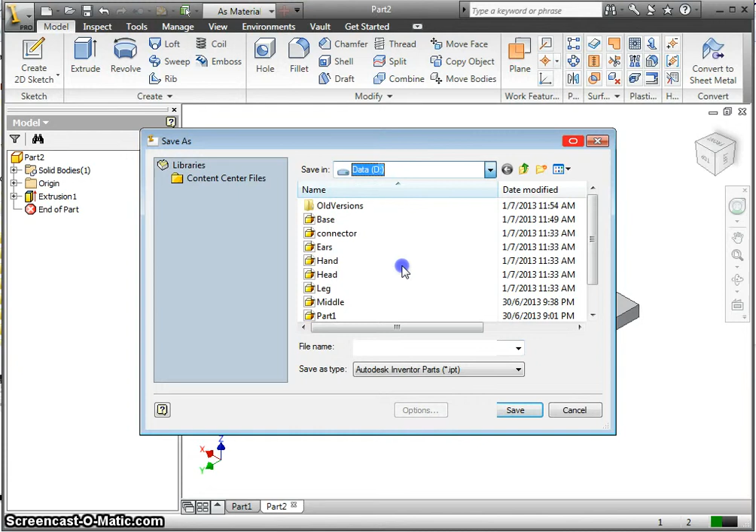I've completed the extrusion. Let's do a save. It's always a good idea to save your work so that you don't lose it when there's a crash.

Okay, I've created a folder called donation box. You can find a place in the drive, create your name. In this case, I'll be Mr. Chua. Donation box. Okay, and I'll save a part. You can save the part as my donation box. Notice the extension is .ipt.

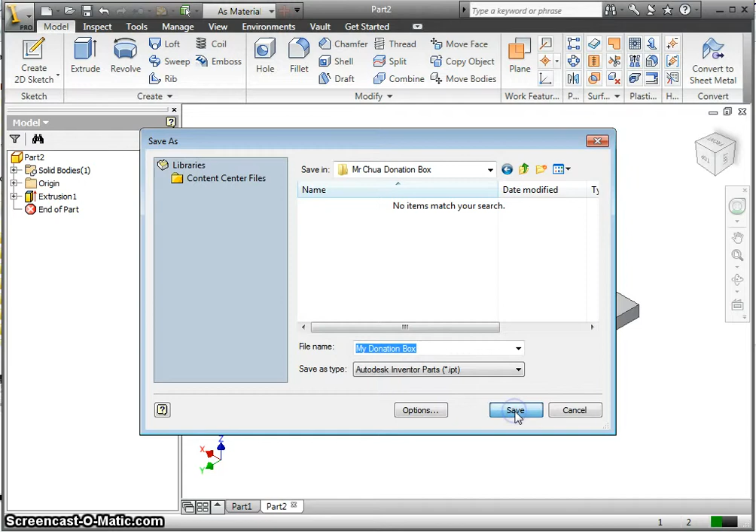This is the standard extension for Autodesk Inventor. Click Save, and you realize that at the bottom of the screen, the part has been changed to my donation box.

Okay, if you look at the left, this is a browser area. There will be one solid body. So now I'm thinking that this solid is the base of my donation box, and I'll build up my donation box from this base. The next thing we'll teach you to do is to create a 2D sketch on top of this donation box base.

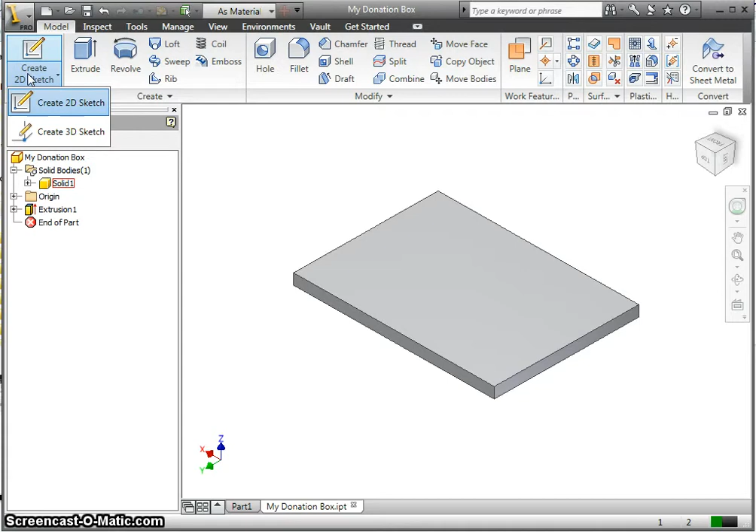Create a 2D sketch and touch the top surface of this cuboid. Touch it, and you will actually create a drawing surface on this. You'll see the yellow lines. Yellow lines means that you are building on this surface enclosed by the yellow line.

So now I'm going to draw rectangles, random rectangle sizes. This may be the walls of my box. I can make it thin, I can make it thick, no problem.

You realize that it clicks. Once it clicks, there will be a green color. This means that it's completely at the edge. Okay, it's very accurate. If it's out, you know.

If it doesn't click, something like this, you get an overlap. So once you have something wrong, you just click Ctrl Z to undo. Undo it, and you can do a rectangle again.

Click to have the green color, and touch the line. You see it clicks onto the line. You'll see that when it clicks, there's this symbol here. See, I move away, no symbol. Touch, the symbol comes out. So this symbol is also an indication that you are on the line exactly.

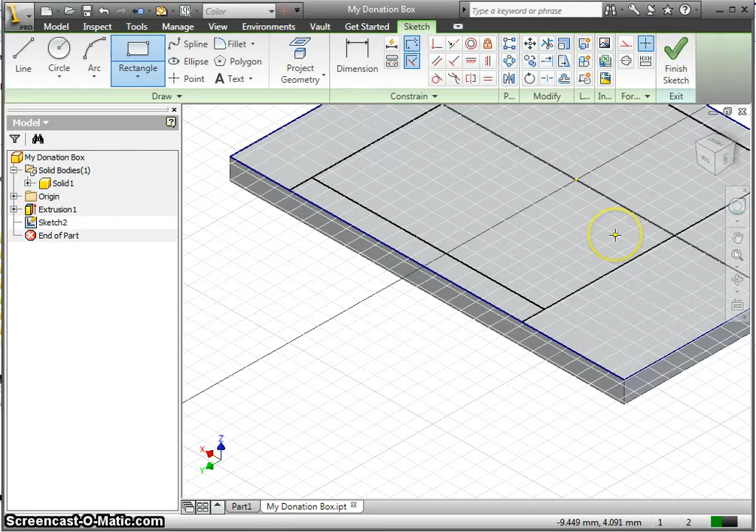Once you have done this, you look, I can actually do a resize by scrolling the center wheel of my mouse, and if I click the center wheel, I can drag it. So click, press to drag, and scroll it to enlarge and reduce the size.

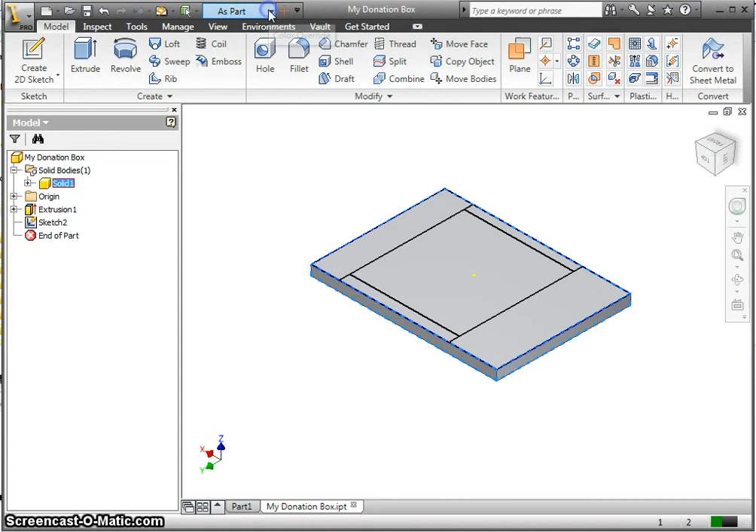So once you're done with drawing the 4 rectangles, you click finished. Then I'm going to change the color of this solid. Click solid, go to the top, click on part, then change it to something drastic, like maybe a pink color.

Now I'm going to do extrude. I click on extrude, I click on any of the walls. I click on the first wall first in front. You notice what happens if I click on this, and then I click OK. You realize that the wall comes up and the drawing disappears.

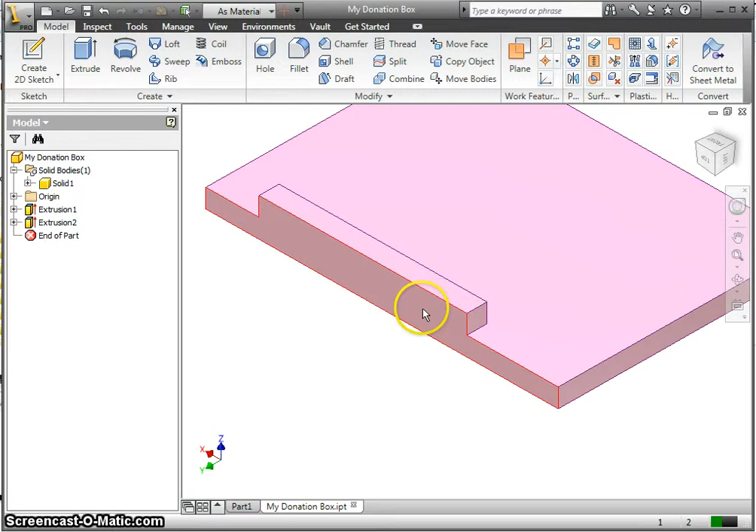But what is significant here is that the new solid that's being extruded is one piece together with the base. There's no distinction. And if I look at the left of my drawing browser, you'll see that there's only one solid, one whole solid. But actually I don't want that.

I want it to be 2 separate solids. How do I do that? You see within that first solid there's an extrusion 1, which is my base, and there's extrusion 2, which is a small piece that's being extruded. If I double click on this extrusion, I can change the parameters of the extrusion, including the length.

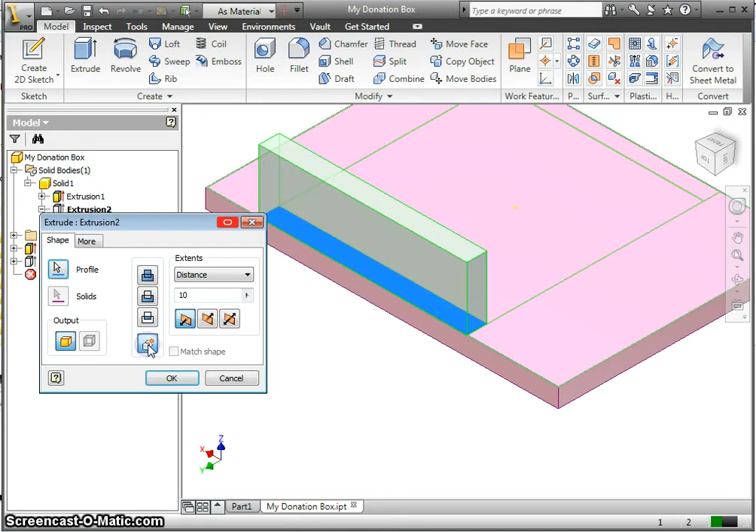I can change it to 5 or maybe 10, and I can click on this very important button called new solid. Once I click on new solid, I click OK. You realize that it's different, it's separate, it's 2 separate pieces now.

And now if I look back at my browser, I'm going to have solid bodies bracket 2. That means there's 2 solids, one is my solid 1, the other is my solid 2. To make it clearer, I can rename solid 1 as base, and rename my solid 2, double click to rename it as my wall 1. Okay, obviously I'm going to create my wall 2, 3 and 4, but let's try create my wall 1 first.

Okay, so we'll end it here. Click save before you end. Click save. Save. Okay.